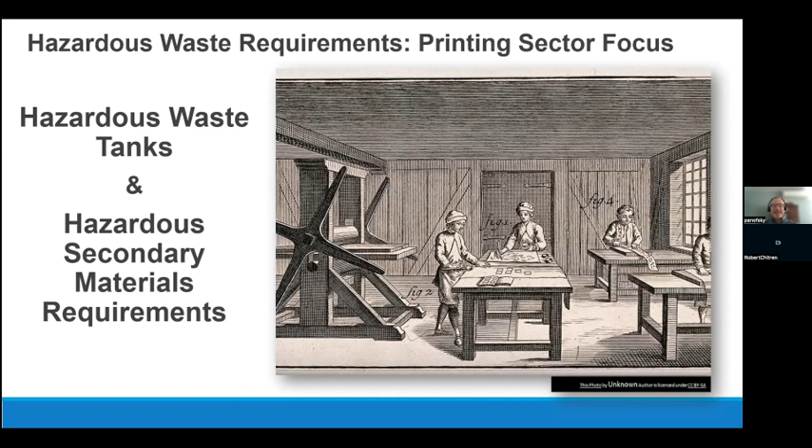But it's important. I think it's going to be important for you guys to see the tough stuff first, which is the hazardous waste regulations as they pertain to tank systems that are accumulating hazardous waste. So we'll start there, and then we'll naturally go into the HSM, the hazardous secondary material. We'll talk about hazardous waste tank systems. I'll go through some definitions. We'll talk briefly about design and management standards, hazardous air emissions and how they might apply, how ancillary equipment is part of tank systems, some confusing equipment, and then ultimately paths to compliance.

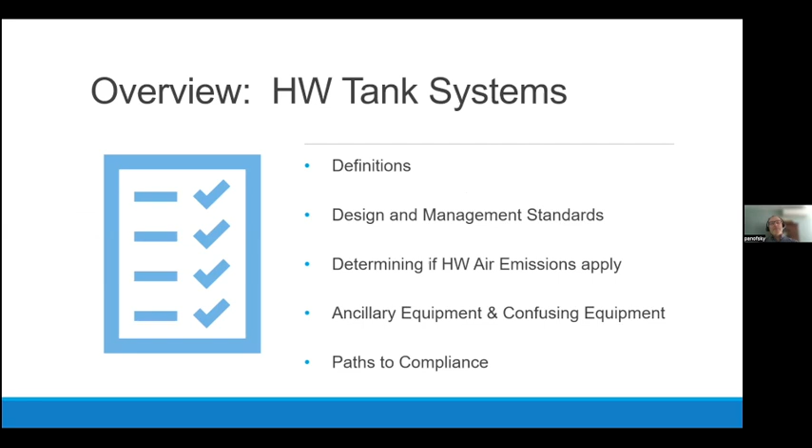So how does RCRA define a tank? And RCRA, I'm going to try not to use too many acronyms, is the Resource Conservation and Recovery Act. Coming from solid waste, I know that there's also subtitle D, not just C, but usually when you're in hazardous waste program talk, you talk about RCRA assuming that it means hazardous waste rules. So I'm talking about how RCRA hazardous waste rules define a tank in haz waste service.

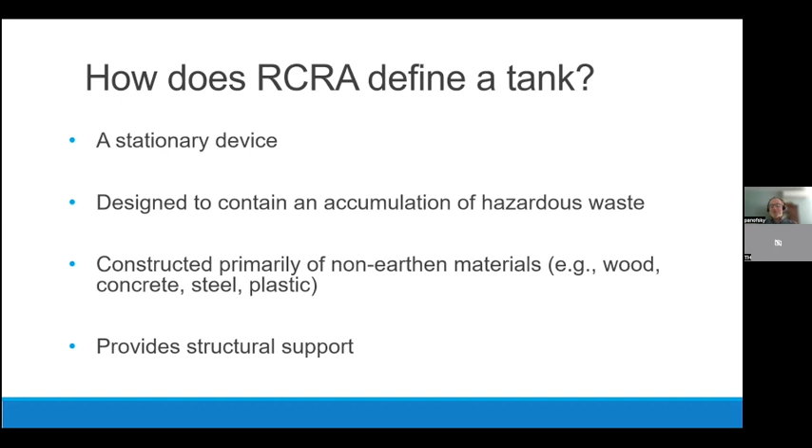They call it a stationary device. It's designed to contain an accumulation of hazardous waste. That's very important. Constructed primarily of non-earthen materials, kind of goes without saying, but could be wood, never seen one. Concrete, not usual. Steel, very common. Plastic, not usual. Sometimes fiberglass. And it has to provide structural support. That's how it's defined.

You know, you look at stuff like this, you go, oh, that's a tank, obviously. They're hazardous waste tanks, but do we know whether subchapter J applies, which are the tank standards for large quantity generators and small quantity? Do the air emissions controls apply to these types of tanks, which would be a level 1 in the subpart CC? Who knows? It takes a little bit of doing.

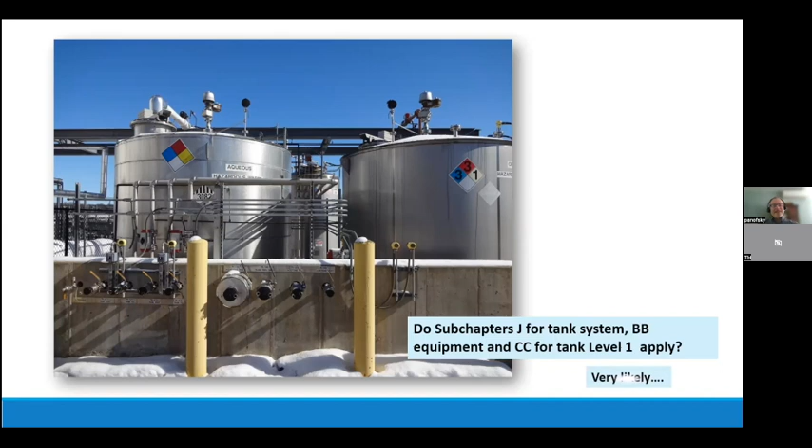What about these tanks? These might look more familiar to some of you. One has been indicated that it is hazardous waste. So it doesn't have to be big. It can be small. It can be near areas of production, but in this case, it's a spent solvent.

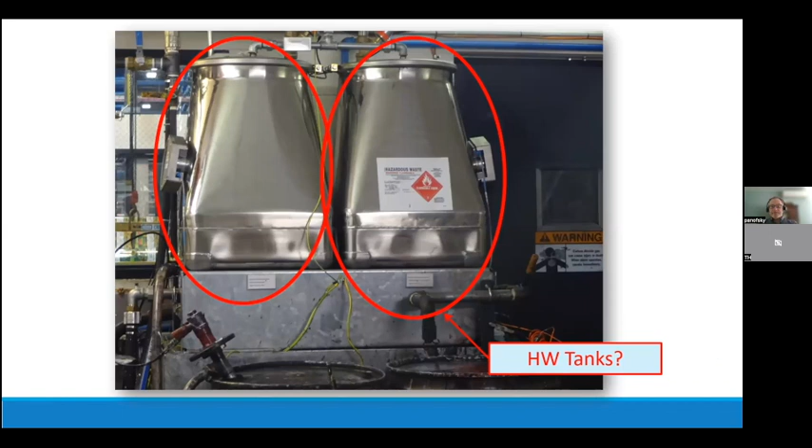So just a quick overview of some of the tank system requirements. LQG, large quantity generators and small quantity generators share some requirements. And those 4 boxes on the left side are the things that are shared with both small quantity and large quantity generators. And that would include things like labeling, general operating procedures, periodic inspections, spill response.

And then the large quantity generator requirements are quite a bit more robust and have more requirements. And so in here are design and installation standards, secondary containment and release detection, even setbacks and segregation for some types of waste, probably not ones that you're dealing with.

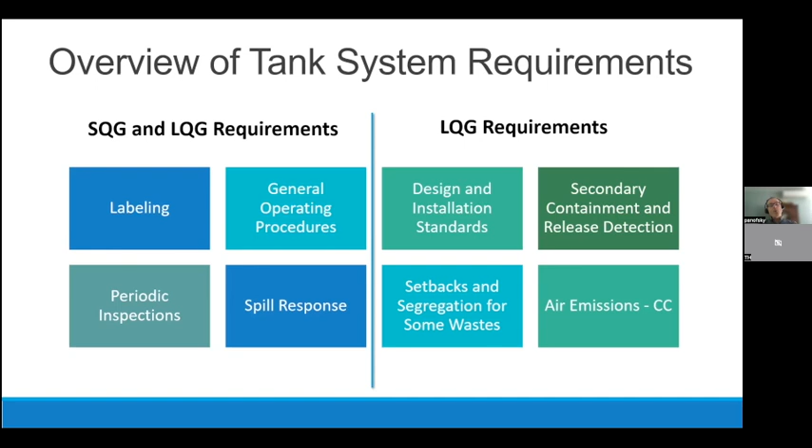And then air emissions. And the subpart or subchapter dealing with tanks is really CC, which deals with containers and tanks. And then there are other ones that are part of air emissions. But those air emission rules and hazardous waste rules are really only for large quantity generators. They would also apply to treatment, storage, and disposal facilities.

So what about other parts of tank system? We don't just say the tank rules, we talk about the tank system rules. And we know that there are lots of pieces of ancillary equipment that are really part of a tank system. That includes things like piping and fittings and flanges, various types of pumps and valves. You're probably familiar with a lot of these different things. And sometimes these things are also subject to the air emission standards for leak detection and repair, or the subchapter BB.

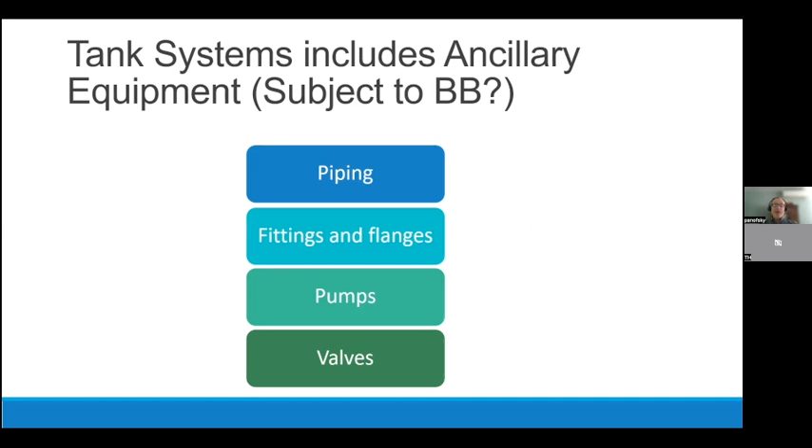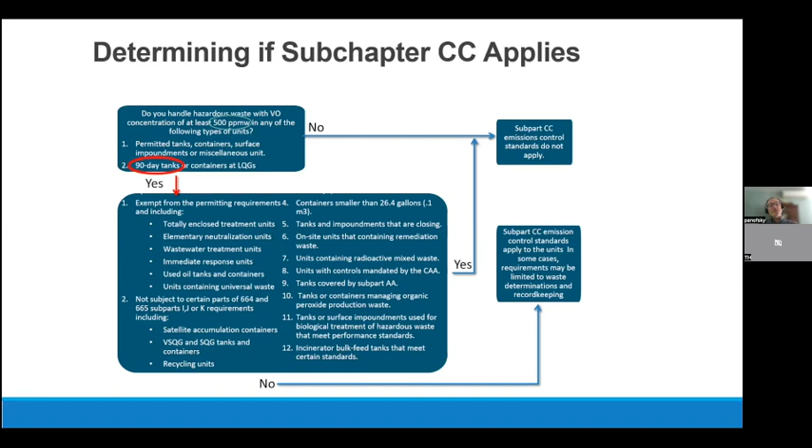So this is a very busy slide, but it's trying to get at the difficulty with the applicability for some of the air emissions rules for haz waste. But in essence, I've circled a couple of things here. If a tank is storing or accumulating materials with a volatile organic concentration of greater than 500 parts per million by weight, which isn't a whole lot of VOCs, and if it's at an LQG, it's pretty likely that subchapter CC of the air emissions is actually going to apply.

So these are some of these pieces of equipment that would be associated with tank systems and that often would be subject to the subchapter CC, again, if it's the large quantity generator. And you know what these are? You probably do. These are what we refer generally to as conservation vents. Some of these have some flame arresters associated with them.

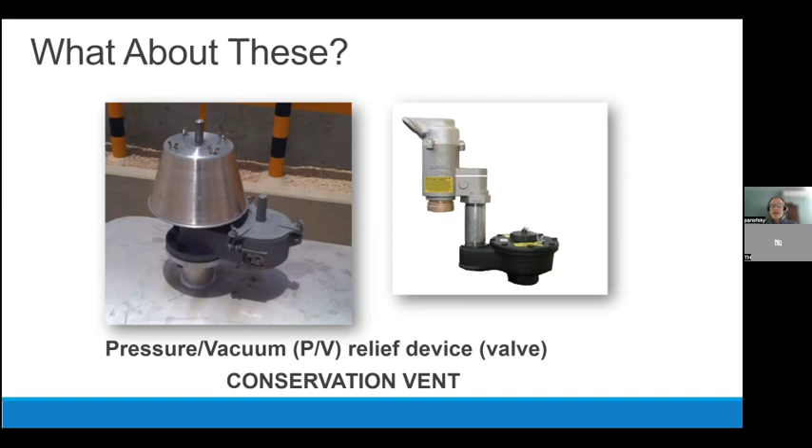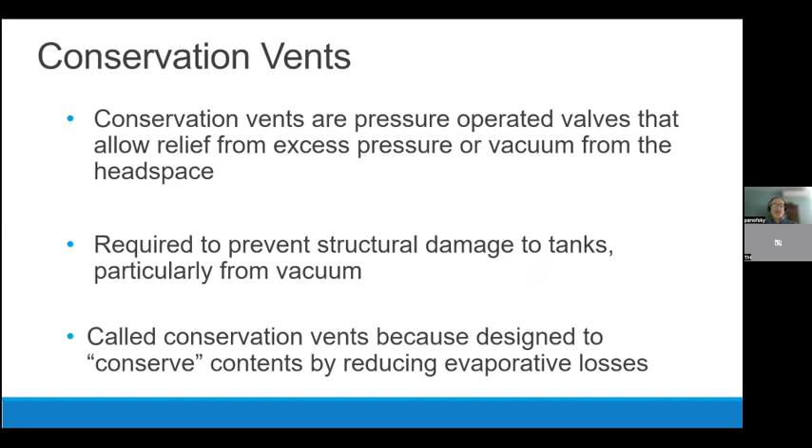The conservation vent on the left side, that right side is the vacuum portion, and then there's the pressure side of it. And so conservation vents are really just pressure operated valves that allow relief from excess pressure or vacuum from the head space. And they're really important to keep tanks from getting damaged. And of course, they're used to conserve the contents, and that's why they're called conservation vents.

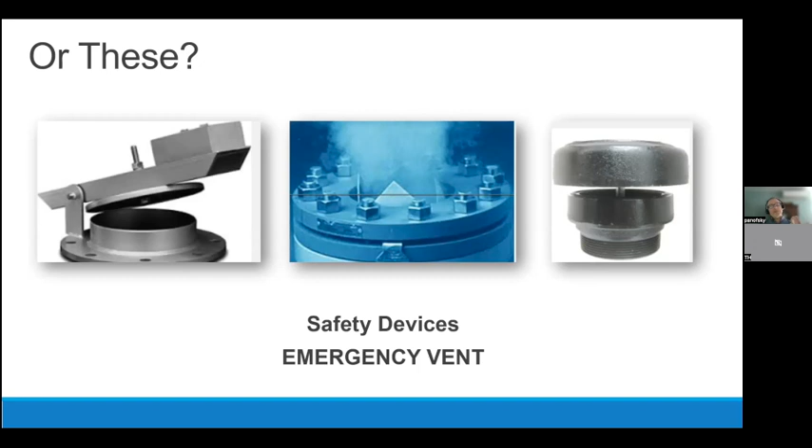What about these things? These are also part of tank systems. They're special equipment. They're safety devices. Usually they're separate from the conservation vents. They can be different styles, and sometimes they're a little bit confusing, but these are also covered under the air emissions portion under CC. What's interesting with the safety devices is that they are actually following a schedule that's shown in subchapter BB, or subpart BB if you use the federal language.

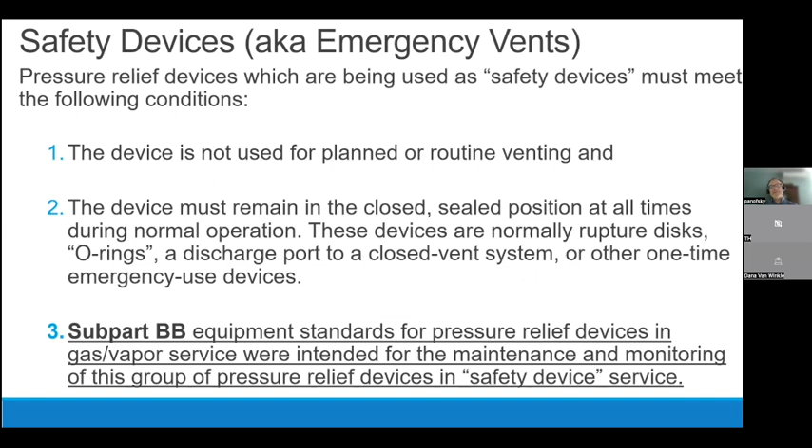I won't get into them too much, but they're just part of those pieces of equipment on top of tanks, if you're a large quantity generator and then you're in the tank subchapter CC rules.

So what are the paths to compliance for dealing with tank systems? Well, there's the simple one. You just meet the hazardous waste tank systems regulations, which are in subchapter J, and they're also in subchapter CC, and they might even be in BB for certain types of equipment. But of course, like all rules in the hazardous waste program, there are tons of different exemptions. If a unit is a wastewater treatment unit, probably not the types of tank systems that have spent solvent. Sometimes there might be something like that at a facility that you might be familiar with.

Elementary neutralization units, certainly product tanks are not in the haz waste realm. Sometimes a temporary response tank, an emergency tank is used. And oftentimes, as asked by a few facilities a few years ago, isn't it closed loop if we do this or do that? We've been pretty consistent with Region 5 that it really needs to be part of the manufacturing process, and it doesn't involve spent solvents that are part of degreasing and cleaning.

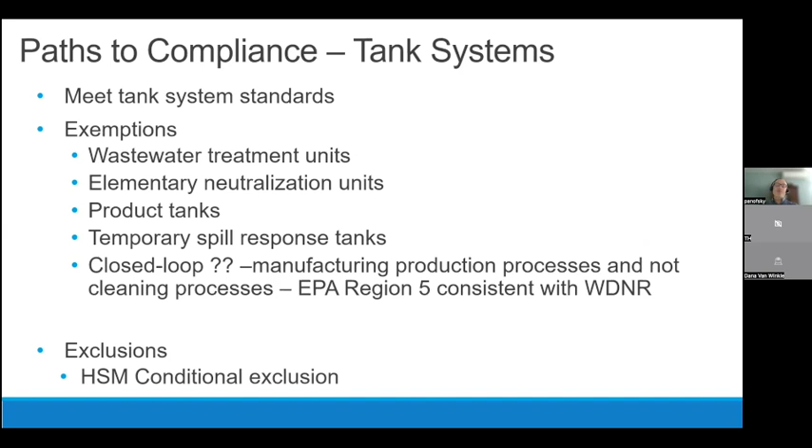This brings into this next important thing I'm going to talk about, which are the exclusions. There are these tank rules, but then this hazardous secondary material provides a conditional exclusion, really for the reclamation and reuse of solvent. That's going to be the important part of the next part of the presentation.

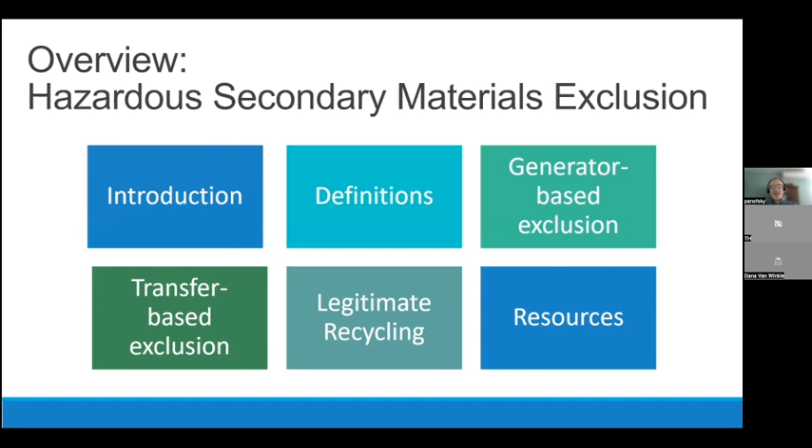This is really going to talk about a lot of definitions, really just how it will get implemented, and this hazardous secondary materials. As a brief overview of what I'm going to talk about, I'll do a little bit of intro, then a lot more definitions because I think it's important. We're going to spend most of the time on the generator-based exclusion. I'll briefly mention the transfer-based exclusion, and also talk briefly about legitimate recycling, since that was part of the rule package that brought in this hazardous secondary materials. Then we'll talk about some resources, some that are kind of new, so hopefully that will be helpful.

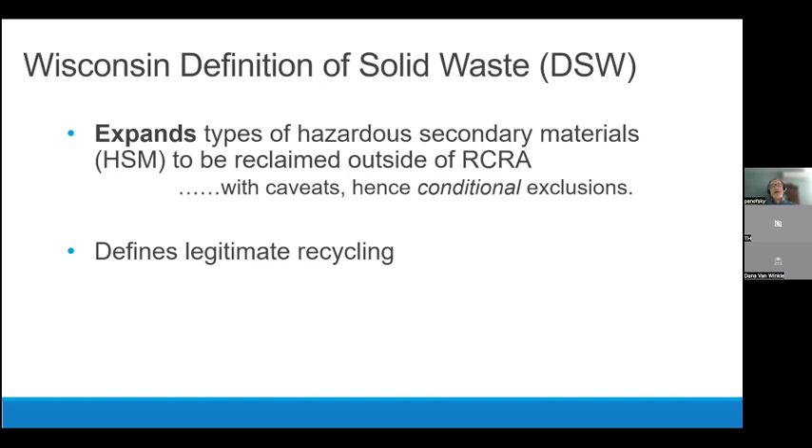With this rule package a few years ago that went through in Wisconsin, the definition of solid waste, which came from federal rules, really expanded the types of hazardous secondary materials, or HSM, that could be reclaimed outside of the hazardous waste rules, with caveats, hence a conditional exclusion. There was also in that rule package the definition of legitimate recycling, which I'll touch on briefly towards the end of the presentation.

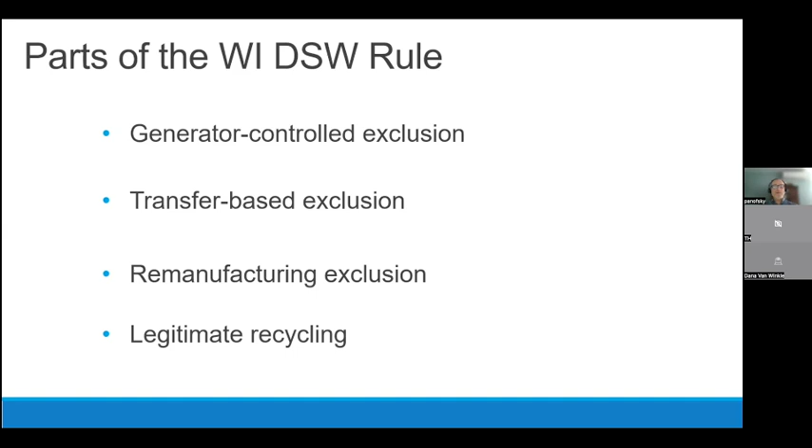Some of the parts covered in this rule package, a lot of these things fall under HSM related, is the generator controlled exclusion, which is probably the most important one for the folks listening to this webinar today. There's also the transfer-based exclusion, which I'll pay a little bit of time to. And then there's a remanufacturing exclusion, which I won't cover at all because it's really dealing with a couple specific sectors, like the pharmaceutical sector, organic chemical manufacturing, and 18 specific high-grade solvents. So that one isn't so applicable. And then the legitimate recycling was part of that rule package that came through.

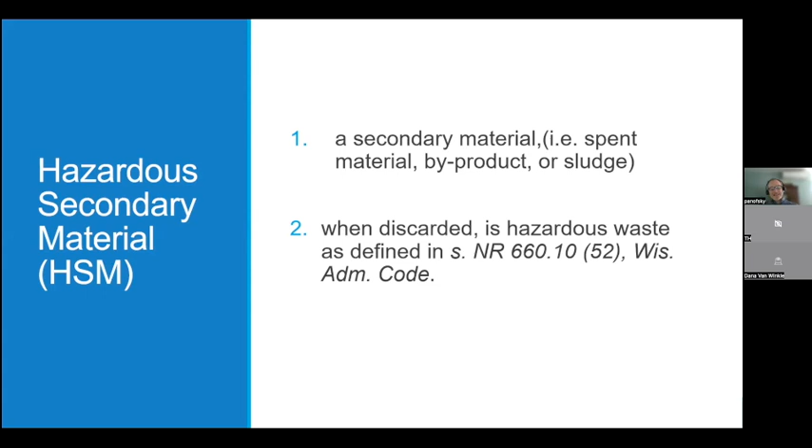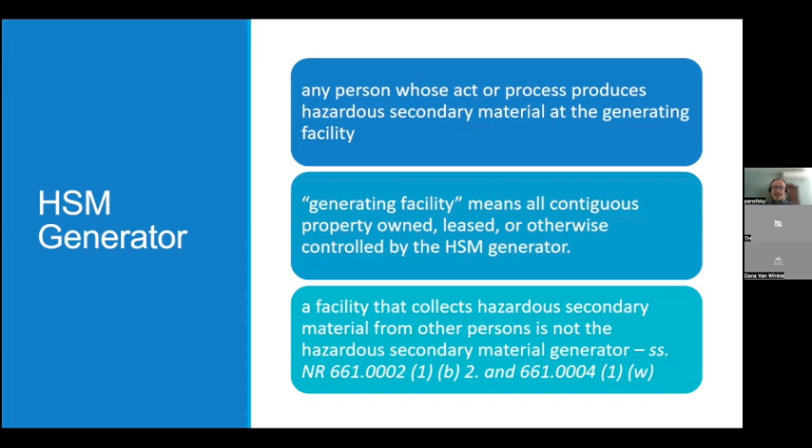So naturally, we want to talk about some definitions. What is HSM? One, a secondary material, a spent material like a spent solvent, for example. And second, if it were to get discarded, it would be a hazardous waste. Who is an HSM generator? Any person whose act or process produces hazardous secondary material at the generating facility. What's a generating facility? It means all contiguous property owned, leased, or otherwise controlled by the HSM generator. A facility that collects hazardous secondary material from other persons is not the hazardous secondary material generator.

Here's a little graphic of the generator controlled exclusion, and there are three sort of flavors of it, all kind of very much related. The first one is reclaimed on-site by the generator or contractor. That's typical - if you have a distillation unit on site for your facility, and a spent solvent, that would be applicable. Sometimes the reclamation happens off-site at a facility under the control, maybe a parent company. And then the last one is this reclaim through a written contract, kind of a tolling agreement. I think of that as really an agreement for both the tolling contractor and the toll manufacturer of those spent materials. So that's all under the generator controlled exemption or exclusion.

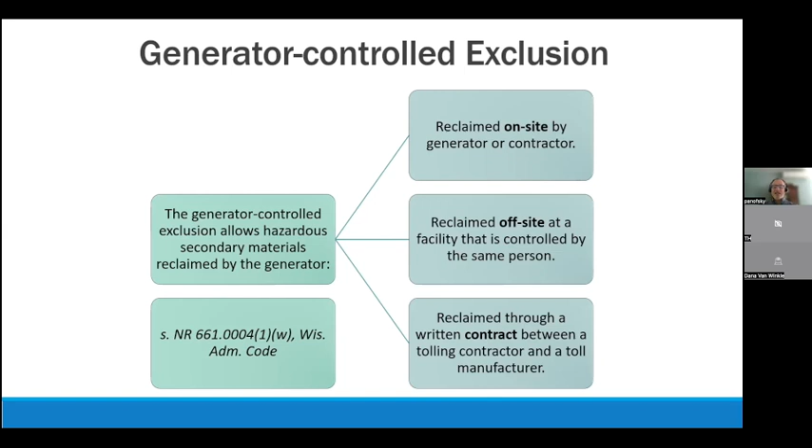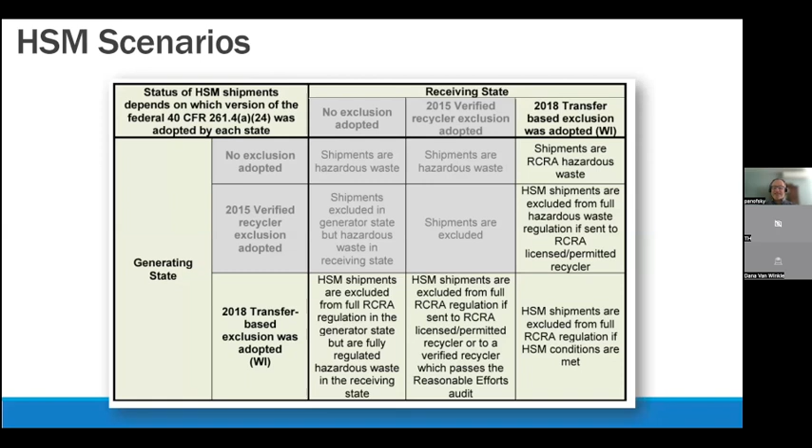This is a slide that Mike Ellenbecker, our Haz Waste coordinator at DNR, helped work on, really talking about shipment of HSM to states that might not have adopted the 2018 - our last version - of this exclusion. Basically, if a state nearby has adopted the 2018 exclusion, or I shouldn't say transfer-based exclusion, but it has the exclusion in hand, it wouldn't be hazardous waste at the border. If the state has not adopted it, it becomes hazardous waste at the transfer.

So this is a graphic - I won't really spend time on it. It's basically also adapted from McCoy and Associates, who have a great reference that I'll provide you at the end. This is showing reclaimed on site: a production process, generation of a hazardous secondary material, some accumulation of that hazardous secondary material, and then reclamation.

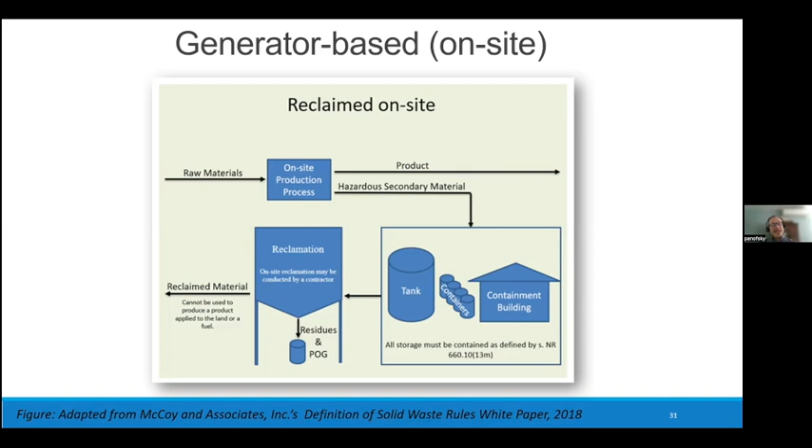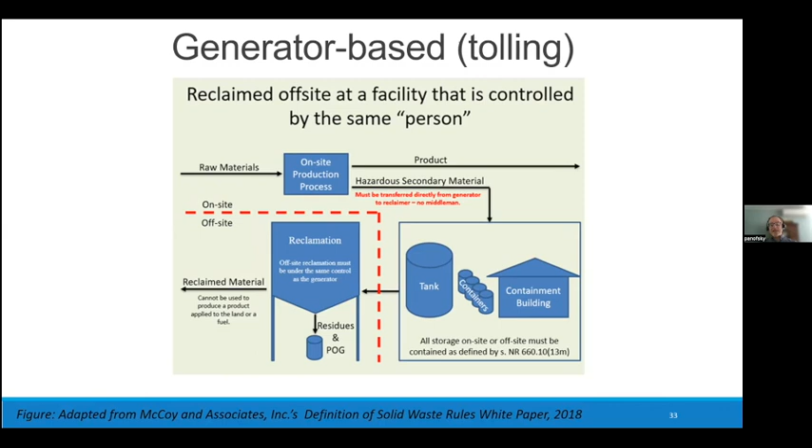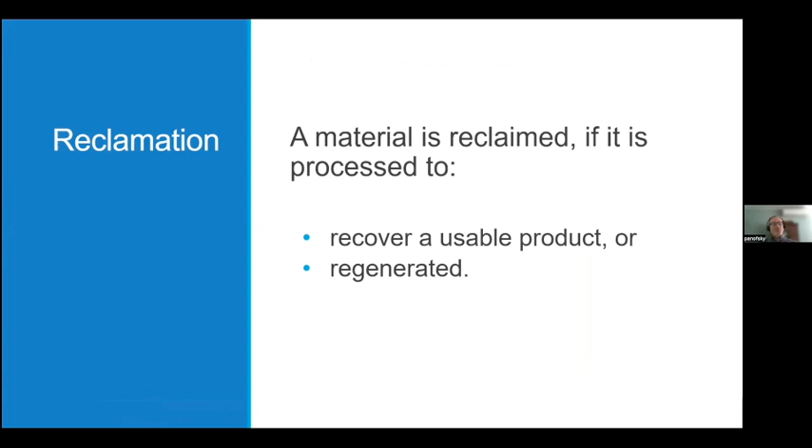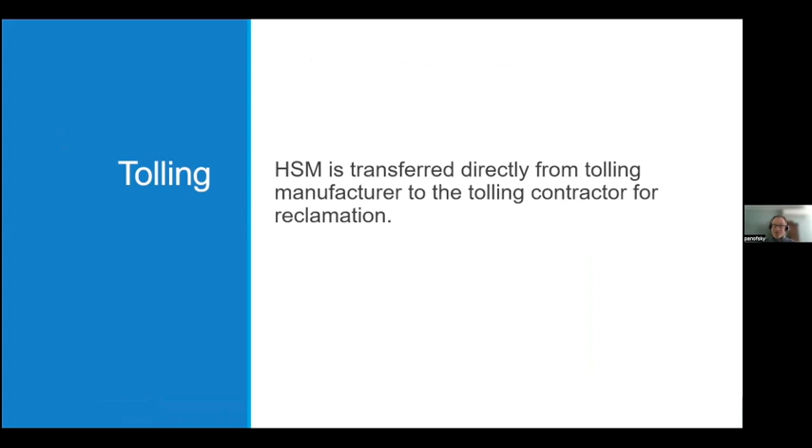So what is the definition of reclamation? A material is reclaimed if it is processed to recover a usable product or regenerated. I guess that makes sense. What about the definition of control? It's the power to direct the policies of the facility, whether by ownership of stock, voting rights, or otherwise. And then tolling - HSM is transferred directly from the tolling manufacturer to the tolling contractor for reclamation.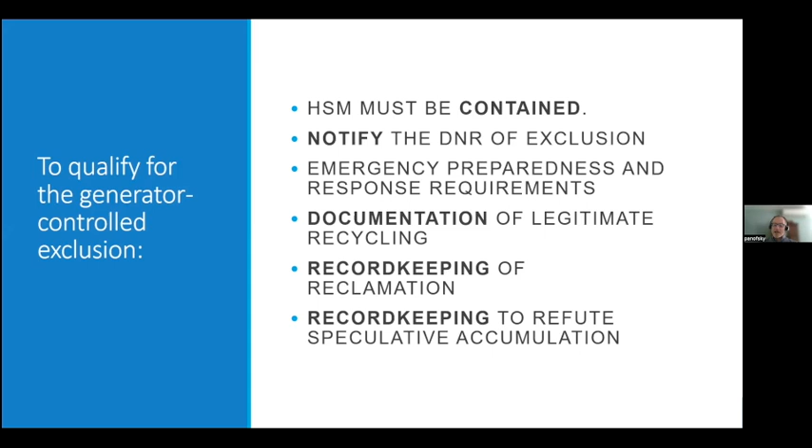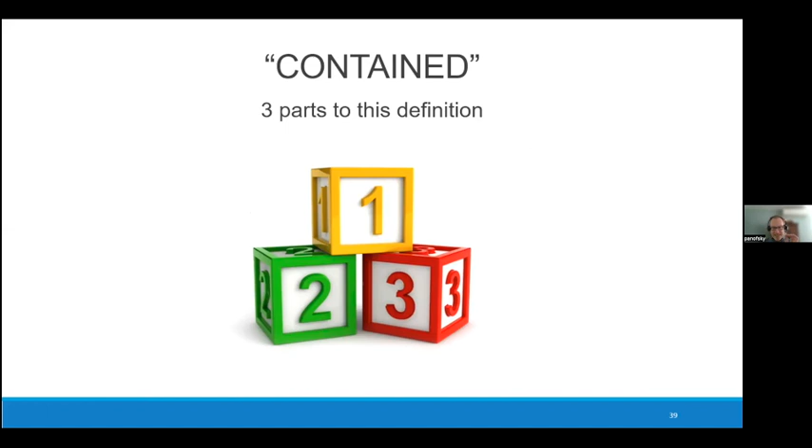So of course we need to get into more definitions. The one that I find very important is to understand what it means for things to be contained. It means that the unit is in good condition, there are no leaks or releases, and it's designed for hazardous secondary material. By no leaks or releases, the rule talks about unpermitted releases - releases that are not covered by a permit, such as a permit to discharge to water or air. They may include releases through surface transport by precipitation runoff, releases to soil and groundwater, windblown dust, fugitive air emissions, and catastrophic unit failures.

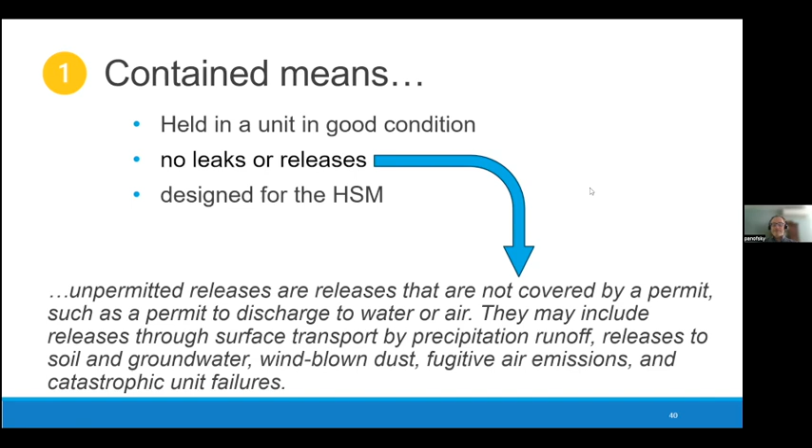So I am moving forward and my slide is not advancing. Uh-oh. Oh, there we go. Hello.

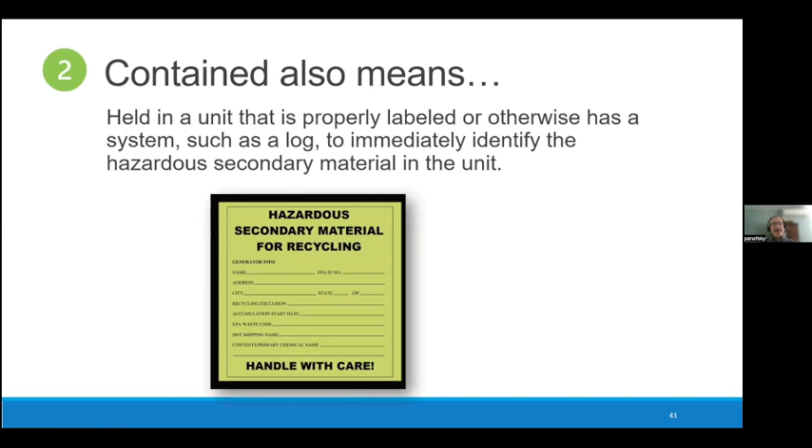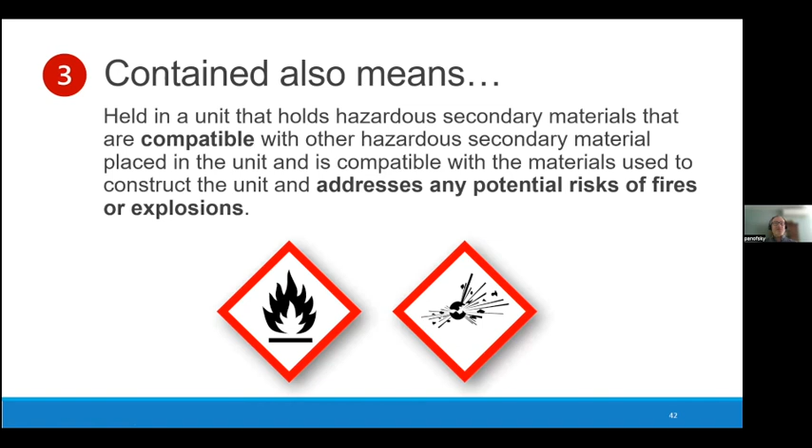Sorry about that. So contained also means that it's held in a unit that's properly labeled, and EPA has given this example of a proper label for a tank system that has hazardous secondary material. It also means that it's in a unit that's compatible, and that its construction addresses potential risk of fire and explosion - that should be obvious.

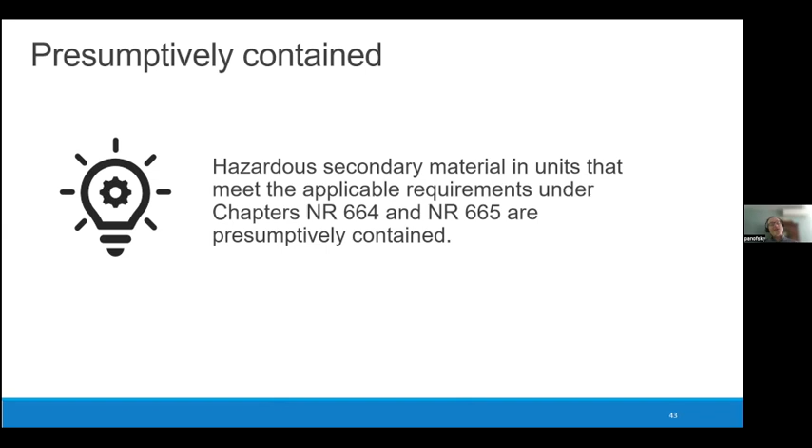And then there are some parts in the rule that say it's presumptively contained if you really meet the standards that are in 664, which primarily deals with treatment, storage, and disposal facilities. And then in 665, that would deal primarily with large quantity generators.

So in summary, there's a definition in the code, but you can't have leaks - nothing visible. You've actually got to control air emissions. It needs to be labeled. And then if you meet the container or tank standards and you meet the RCRA air provisions that are in the rules, it's presumed to be contained.

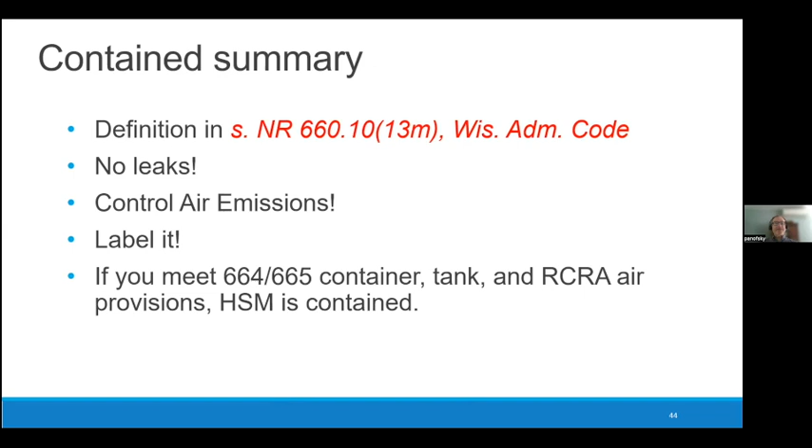So record keeping for the generator controlled exclusion is really important. They need to be readily available - if a compliance person from EPA or from DNR comes to visit you, they need to be maintained for at least 3 years. They also need to document legitimacy - I'll talk more about that in a bit. And for different facilities, if there are multiple facilities, and if there are tolling agreements, those records also need to be kept.

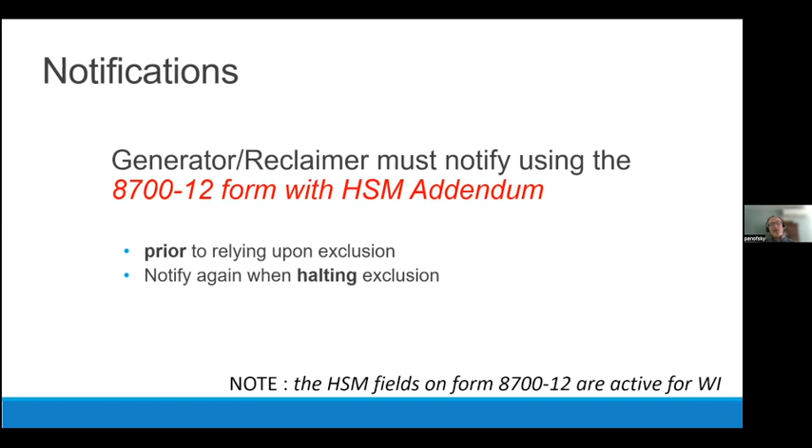So an important part of that conditional exclusion is notification. Before relying upon the exclusion, or when one stops using the exclusion, you need to notify. That's done through the 8700-12 form, which now has this addendum for HSM, and those fields are active. And then there needs to be reporting - I think it's every other year, with reporting activities from even numbered years on the Haz Waste annual report, which would be due by March 1st of each odd year. And that needs to be this re-notification, again with 8700-12.

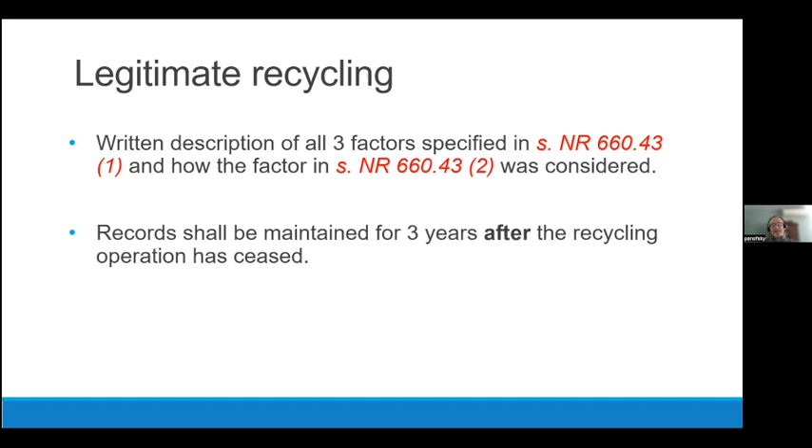And then the legitimate recycling as part of these records - there needs to be this written description of the factors I'll talk about a little bit. Those need to be maintained for 3 years after that recycling operation has ceased. And then there also can't be speculative accumulation - there's 6 criteria, they're kind of all pretty wordy, but sort of make sense. The material is potentially recyclable and has a feasible means of being recycled, and in the calendar year, the amount of material recycled or transferred to a different site for recycling equals at least 75% by weight or volume.

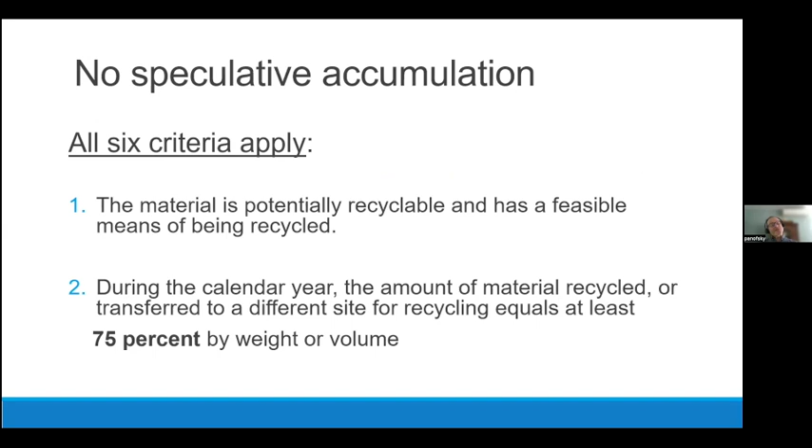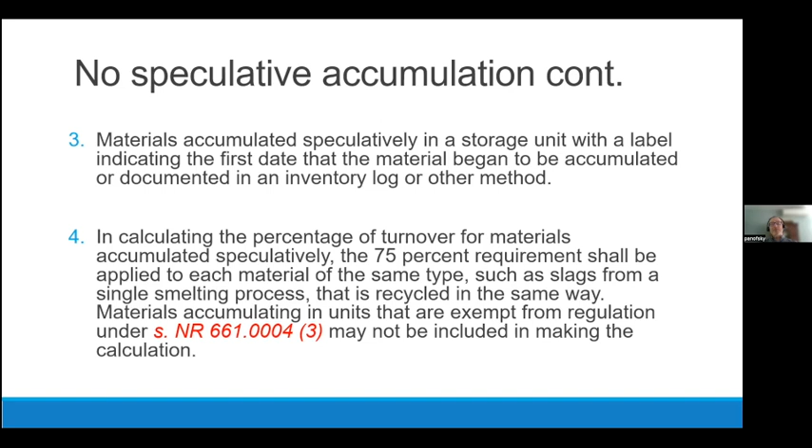The material accumulated speculatively in a storage unit has a label indicating the first date that material began to be accumulated and documented. There are a couple other factors for the speculative accumulation. We also have a guidance document on this, and I'll give you the links to the guidance documents.

The other part that's important with the generator-based exclusion is the emergency preparedness and response. That's in subchapter M of chapter 661 of our code. It has two tiers, one for less than 6,000 kilograms on site, which is about 13,200 pounds of material. Then there's one that would be more or less like the LQG requirements, and those emergency preparedness and response plans would be very similar to the large quantity generator emergency preparedness and response plans.

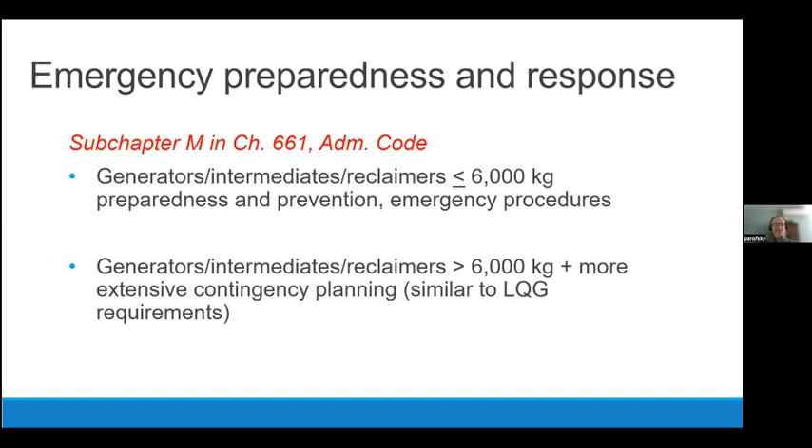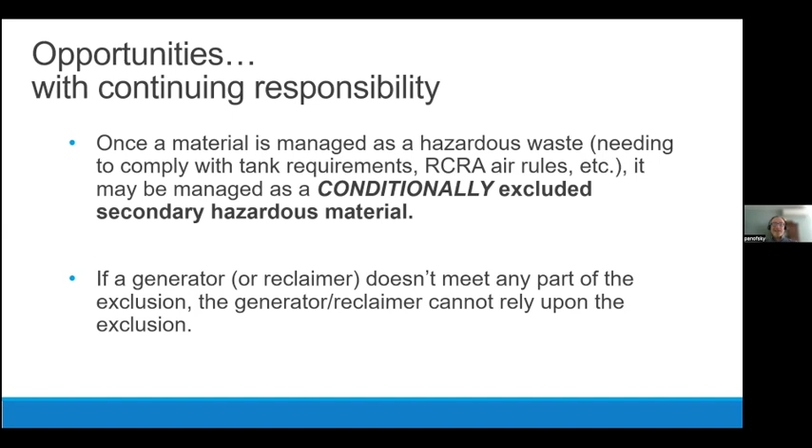So in summary with this, it's really the HSM rules, especially the generator-based exclusion, that provide opportunities with continuing responsibility. Once a material is managed as a hazardous waste, it can be managed as a conditionally excluded secondary hazardous material. It's not like you can just decide to do it one day—you have to plan it and follow those conditions of exclusion. If a generator or a reclaimer doesn't meet any part of the exclusion, they can't rely upon that exclusion, and that has compliance ramifications for sure.

So a little example, and some of the words in here are just to try to confuse you a little bit. Let's say if the hazardous secondary material rules weren't being used in the state of Wisconsin, there's a facility that generates a lightly used solvent that gets transferred from a parts washer. Let's say it's within a permanent total enclosure to confuse things, pumped through double-walled steel piping, all the joints welded, with a series of valves, going to a 5,000-gallon stainless steel used solvent tank, and it looks perfect, beautiful. This used solvent tank is then also connected to a distillation unit, and that distillation unit generates some still bottoms and sends reclaimed solvent to a clean solvent tank.

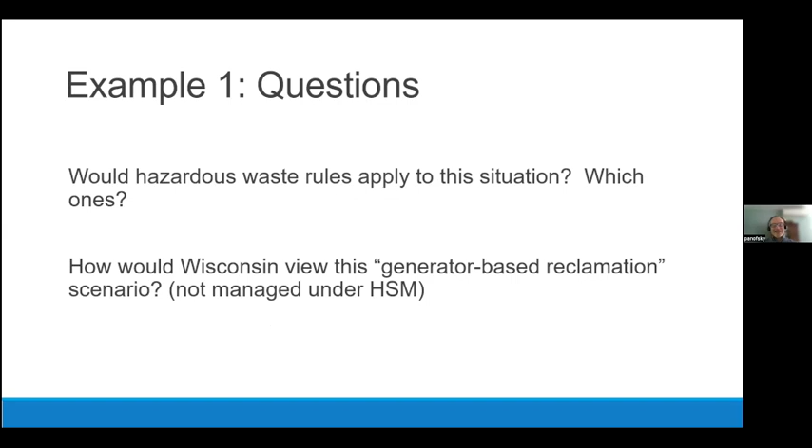So what Haz Waste rules apply to this situation, and which ones? And if the generator were to use the generator-based reclamation, how could it fall into the HSM? What changes would there be if the generator-based exclusion is followed?

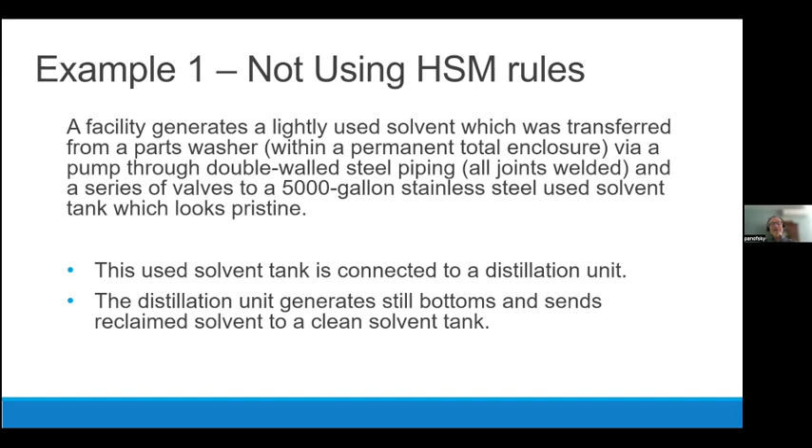Right off the bat, without HSM being considered, there's a lot of this stuff that would be subject to hazardous waste rules, even if it's going to a distillation unit. The only thing I know for sure, if HSM is not considered, is that the distillation unit is a recycling unit and it's probably not part of the hazardous waste rules. But that tank prior to the still, yeah, that's subchapter J that's going to cover that tank. A lot of that equipment is probably going to be subject to air emissions rules as well. So you can see there's a lot of stuff—even if you had a pump or some valves that are totally enclosed, they'd still be subject to the BB equipment rules, assuming you had 10% organic in that valve or pump. So there are a lot of haz waste rules that come into play if HSM isn't considered or used, I guess.

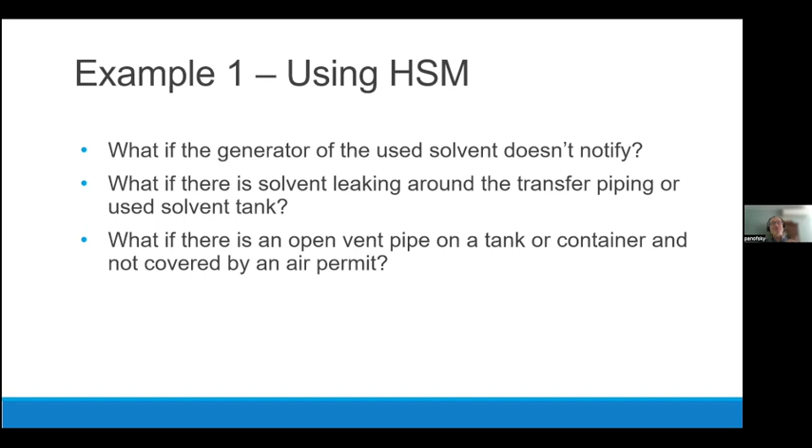So what if we did have a generator want to get into using HSM? All of a sudden, a lot of haz waste rules wouldn't come into play. But what if they thought they wanted to rely upon HSM and they hadn't notified? What about if the transfer piping or the used solvent tank had a lot of leaking? What if that tank had an open vent pipe or some emissions not covered by an air permit? These are getting into that conditional aspect of HSM—all of a sudden you wouldn't be conditionally able to claim HSM if you hadn't notified, or if you've got leaking. In other words, things need to be contained and you need to notify. You get the picture here.

Another aspect of HSM was that transfer-based exclusion, and that allows a generator to send materials to a reclaimer that doesn't have a RCRA license, provided the generator has made reasonable efforts to ensure that the chosen reclaimer will properly and legitimately reclaim the hazardous secondary material and not discard it.

There are responsibilities—I'm not sure why my slides are not advancing on occasion. Let's see here, there might be a slight delay, David. I'm not sure why there's a significant delay then. Oh, I'm sorry.

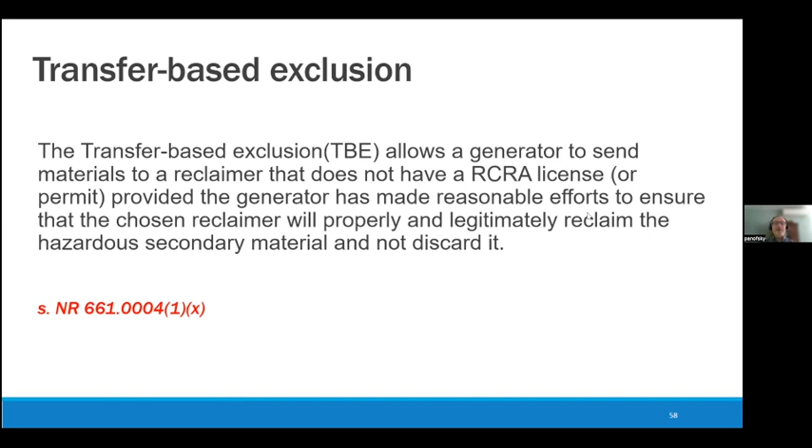Maybe it just gets hung up. But anyway, the next slides will basically show sort of what the responsibilities are for the generator for the transfer-based exclusion. And then it will show, yeah, I'm totally hung up here. Sorry about that. There we go. All right, well, maybe I touched something, that's probably what I did. I had my cursor somewhere.

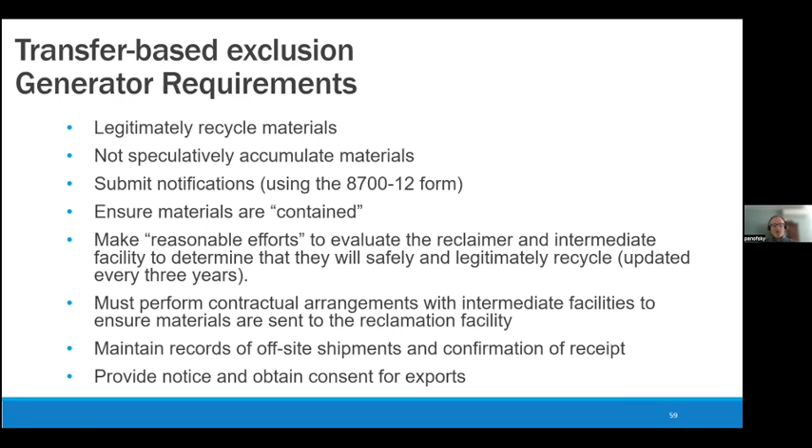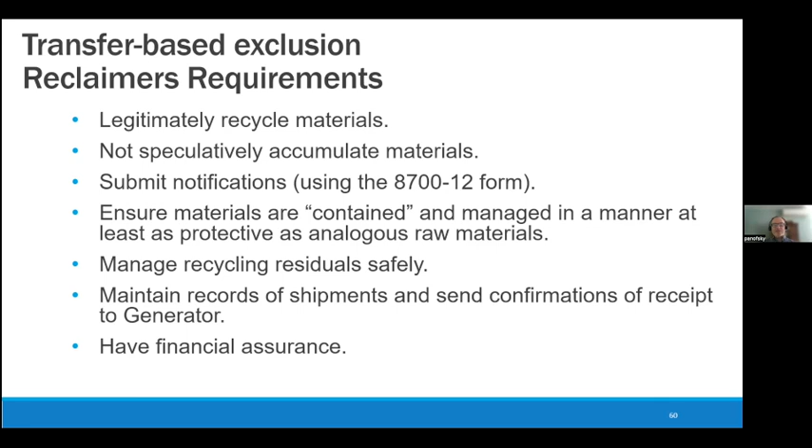So in terms of the generator requirements for the transfer-based exclusion, again, materials have to be legitimately recycled, no speculative accumulation, notification, that should all sound familiar, containment, reasonable efforts that the reclaimer is doing the right thing. There needs to be a contractual arrangement between the facility. There have to be some records maintained for offsite shipment and confirmation of receipt, and then notice and consent for exports. And then there are requirements on the reclaimer side of the house, again, that it's legitimately recycled, blah, blah, blah. I'll let you guys look at it on your own time, but there are requirements on both sides, from the generator side and the reclaimer side.

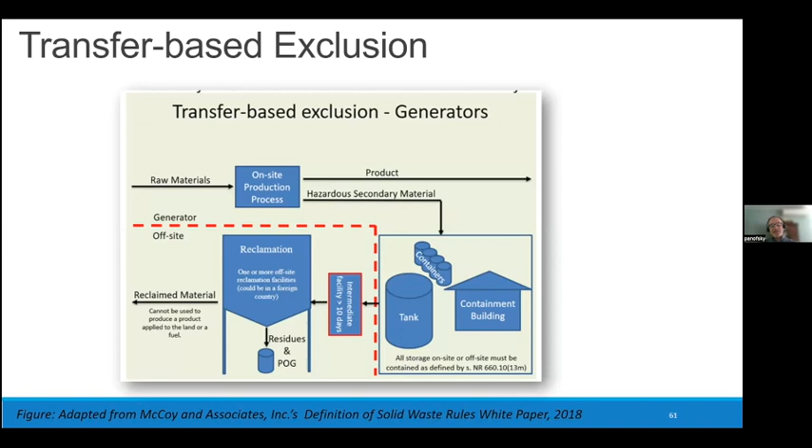And this is a little graphic similar to the generator-based exclusion that shows the transfer-based exclusion. And before the reclamation here for the transfer-based, it's worthwhile noting that the intermediate facilities can hold on to that material for greater than 10 days.

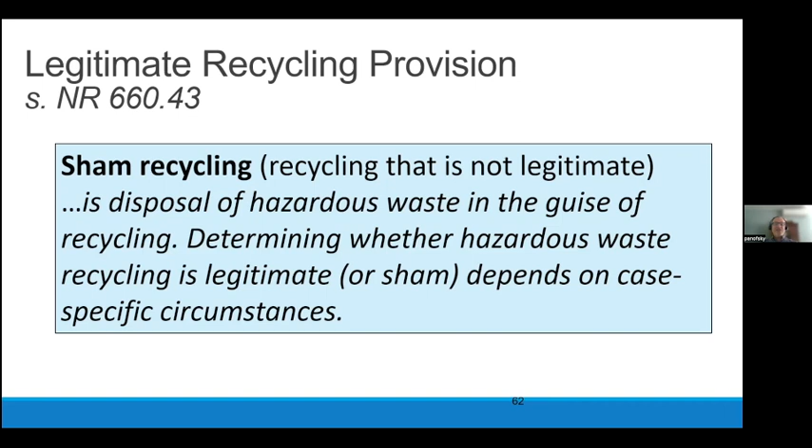All right, so the definition of solid waste included a lot of provisions for hazardous secondary materials. It also included sort of a tied piece, which is this legitimate recycling. And just as some background, we know that sham recycling isn't legitimate. It's really recycling that isn't. Sham recycling is defined as disposal of hazardous waste in the guise of recycling. Determining whether hazardous waste recycling is legitimate or sham depends really on case-by-case circumstances.

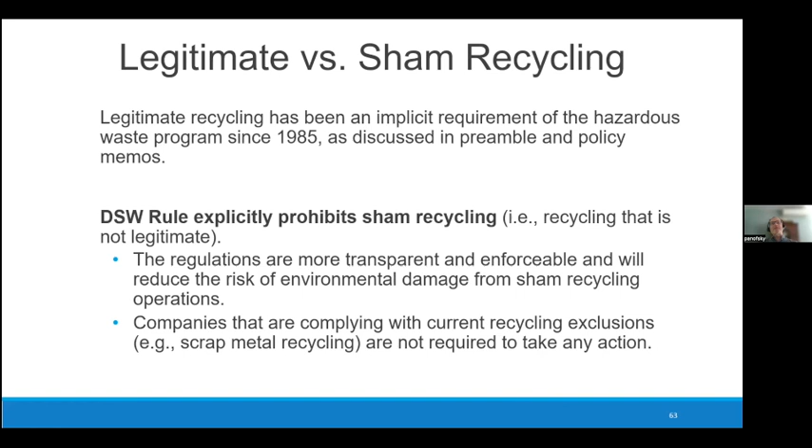So EPA had been grappling really since the beginning of the Haz Waste program in '85 with legitimacy, and the DSW rule and the modifications that we made to our rules explicitly prohibit sham recycling. It really made the regulations more transparent, more enforceable, and so it brought these standards that had been in many guidance documents eventually into rule, and also into Wisconsin rules. There are four main parts to it, and there are three things that have to be met. And again, this is really with documentation.

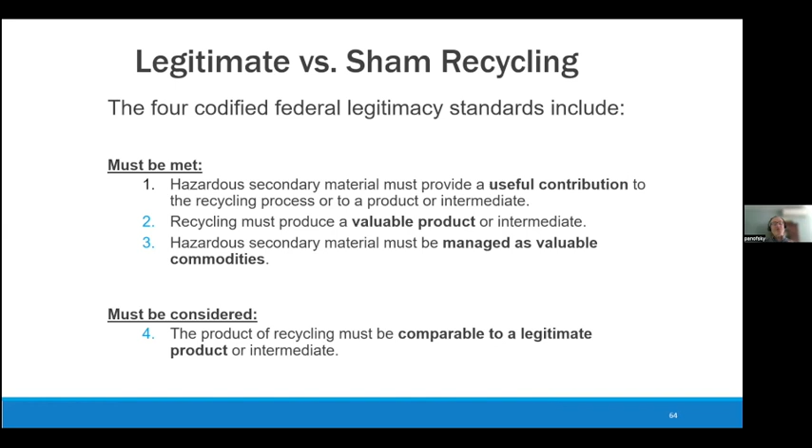The first one is that hazardous secondary material must provide a useful contribution to the recycling process or to a product or intermediate. Two, that recycling must produce a valuable product or intermediate. Three, hazardous secondary material must be managed as a valuable commodity. And then the thing that must be considered, the product of recycling must be comparable to a legitimate product or intermediate. To me, for the printer sector and spent solvents, this is a really easy thing to document. It becomes more difficult when you have, I would say, less valuable items that you're trying to reclaim or distill in this case.

So we are winding down. I'm not even sure what we're doing for time. I probably ran through everything so quickly. But again, we'll have some time for questions.

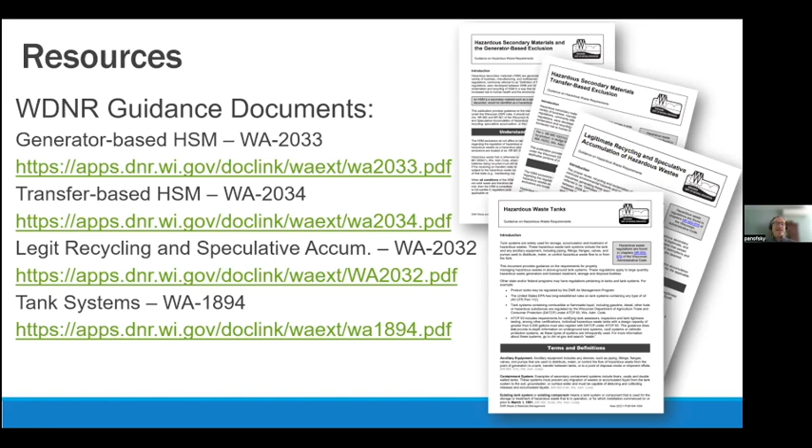We have published not that long ago 4 different guidance documents, and in the presentation we have links to those. And these are little screenshots of what they have. There's one dealing with hazardous waste tanks, because sometimes you're going to have to deal with those one way or another. And then the 3 others are dealing with mostly HSM related things: the generator-based exclusion, the transfer-based exclusion, and then there's one specific to legitimate recycling and speculative accumulation.

And then for extra credit, you can read the final rule at the federal level, and there's a whole bunch of information there. One thing that I find really, really useful is McCoy's white paper on the definition of solid waste, talking much more in-depth background as well as interpretation of those federal rules. So I would highly recommend the McCoy's white paper.